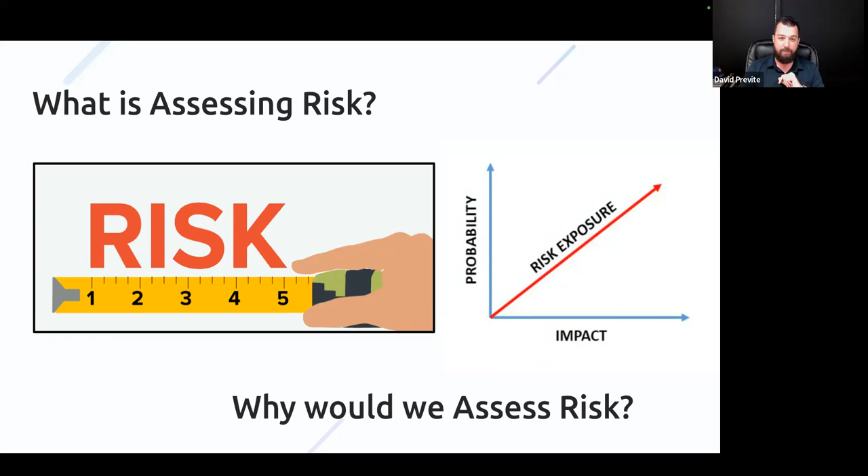I know we're starting at the basics here, but I think it's constructive to go back to basics and build the foundation sometimes. Next question is, why would we assess risk? Well, the answer is pretty simple, obviously, and it's dollars. If you understand your risk, then you can appropriately determine what is and isn't good value, because something that is very low cost but is also certain to fail is actually very poor value, because your money's being completely thrown away. At the same end, over-specifying something uses a lot of money, but may not be good value because it was actually a low-risk scenario.

So when's this important? Purchasing of any building element is an investment. So whether that's waterproofing or fireproofing or structural considerations, anything like that, you're paying money and you want to get something in return, right? Another couple of points here. Good value equals high waterproofing performance per dollar spent. Okay, so how do we do that?

Well, strangely enough, it's using a risk matrix, which you guys probably would have seen at some point in your career. These type of matrices are often used for safety, but it can be used in the exact same way for any quantification of risk. And like we touched on before, on our y-axis over here, we have a probability of it occurring. So what's the chance, from rare to almost certain?

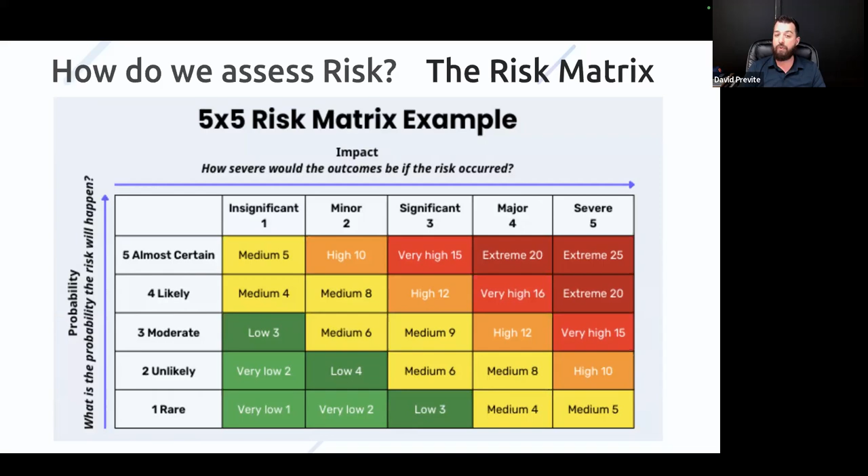And then on the other axis here, we have how severe would the outcome be? And then we've sort of got our heat mapping diagram there of, when you multiply those two together, what sort of rating you get for your risk. And just to show that off nicely here, we've got these cool little diagrams, which I thought was a nifty way to demonstrate this.

So start with the bottom left, low probability, low impact is jumping across this. There's a low chance that you're not going to make it, and if you didn't, it doesn't matter. Then we've got our opposite corners here, which is a low and a high combined together, so you can see what that means. And then, of course, the extreme on the other side is a high chance of you not making that jump, and then also a high consequence if you fail to make it. So again, probability times impact equals risk.

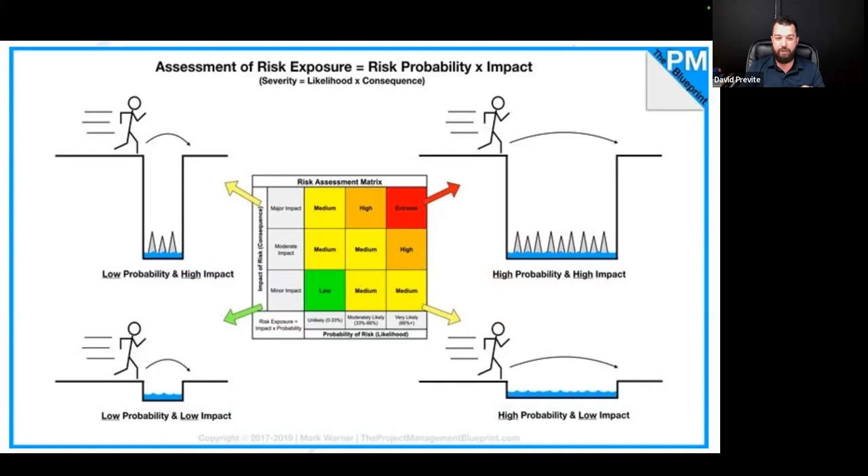So let's now take those basics and start applying them to waterproofing. So let's have a look first at our y-axis there, which is probability of water ingress occurring, and what are our considerations around probability. And the first one of those is the area open to the sky. If you're having an area which is open to the sky and gets rained on and gets very wet every time it rains, then you have a much higher chance of that location resulting in water ingress as compared to a covered area, such as balcony over balcony, just because the intensity of rain that would have to reach that balcony over balcony is a lot higher. So that's our first consideration.

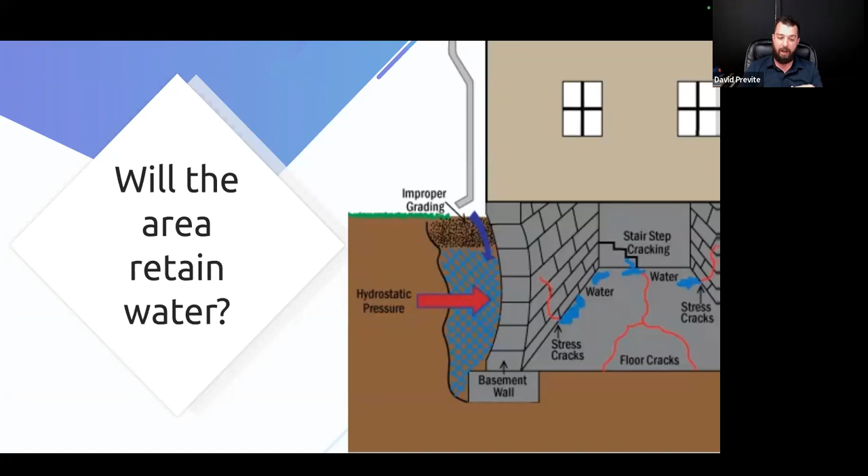Next one is, will the area retain water? So this is our below ground consideration here. Obviously, if we have a water table here, it's fighting against water constantly. So that's another high level exposure that we're having to fight against, that increases the probability.

And the next one is, is the area structurally stable? So this is particularly important to waterproofing, because if you don't have a stable substrate that the membrane's applied to, specifically around liquid membranes and whatnot, sheets are a little bit more fault tolerant. So is it structurally stable? If it's a lightweight frame or something of that effect, you're going to have a lot more movement, a lot more chance of a failure potentially occurring compared to a more stable substrate like reinforced concrete. So that's just 3 examples. There are a lot of other factors to consider that increase the probability of a failure occurring.

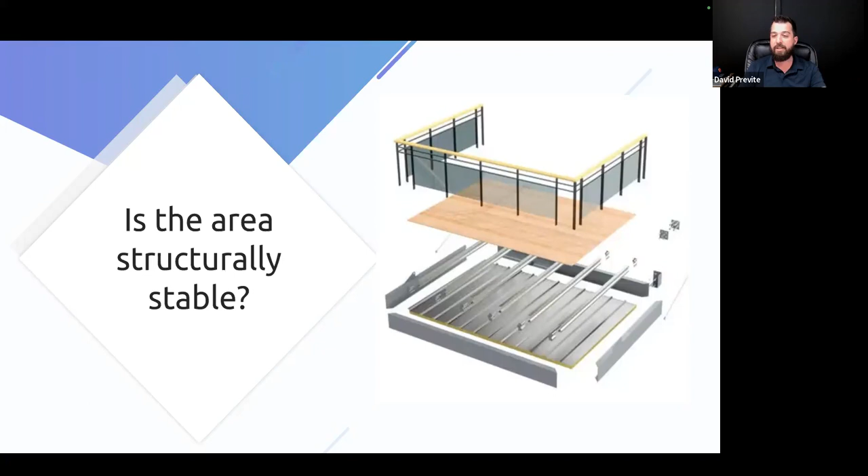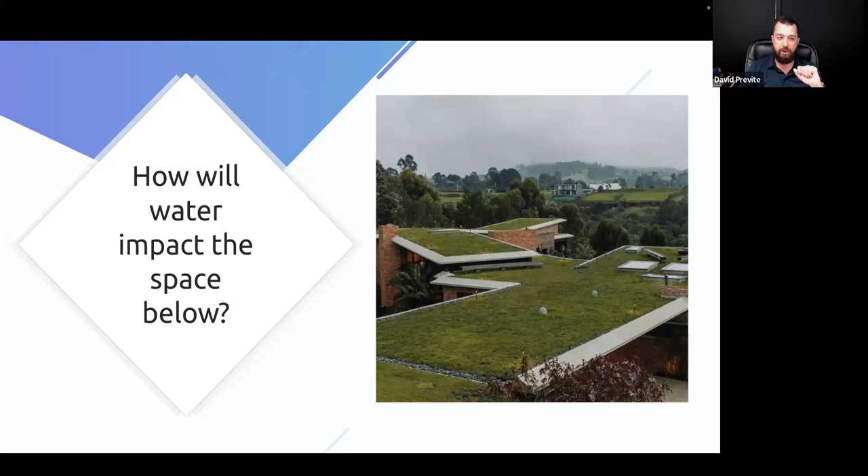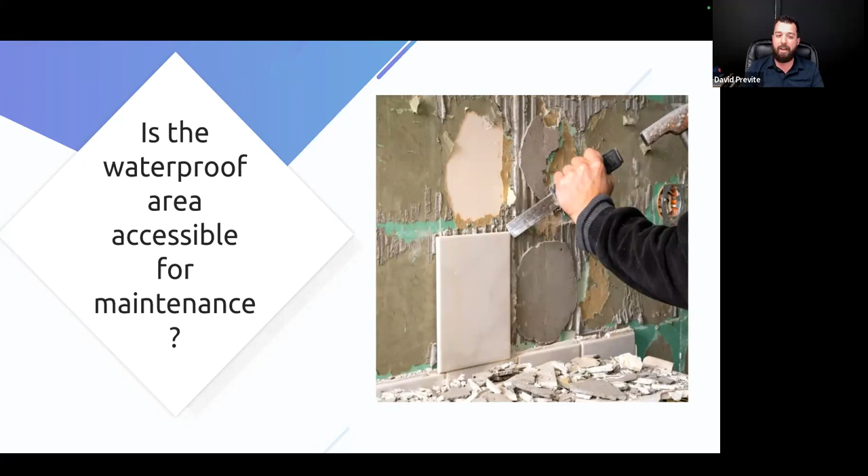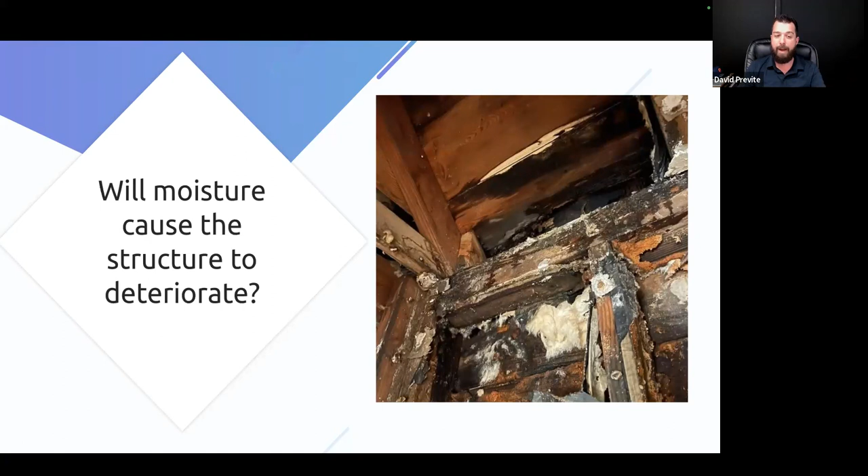And then finally, will moisture cause the structure to deteriorate? So we all know a lot of different types of structures. Some are going to be much more susceptible to water and moisture deterioration than others. So if water does bypass the membrane, how badly is it going to damage the structure? In this instance here, pretty badly. Also have another nice example here. While concrete is more water resistant, it definitely can fail through carbonation of the concrete, oxidization of the reo and whatnot. So just important to point that out while it is lower.

You can reduce the probability of a fault occurring by eliminating the water sources, and use waterproof systems specialized for the proposed area. So a custom solution rather than a generic solution. I can't tell you how many times we see a liquid membrane proposed for an area just out of habit, and no one actually thinks about what is the right thing for this specific scenario.

Next one is use premium quality waterproofing systems with an increased design life and warranty, just so there's increased confidence in the performance. Next one is use multiple lines of defense. So if your primary system does fail or you think there's a risk of it, have a backup layer.

Probably a simple example of this is if you were to do below ground waterproofing and you had habitable space inside, our advice would be to never rely on just one line of defense, especially when it's so hard to rectify and the consequence is so high. You want to apply an external waterproofing, and then you also want to have an internal liner applied to capture that water in the event there's a failure.

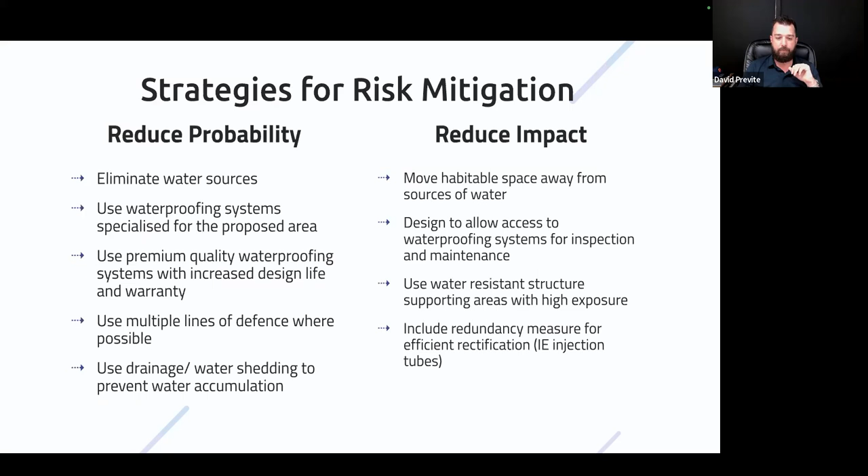Okay, so now that we've established all of that, let's look at a couple of examples and try and quantify the risk on those areas. So this one here, we've got a low chance and low impact outcome. This is a concrete balcony over balcony, and we've applied a low cost liquid membrane to a stable substrate, being reinforced concrete. It is also over an external area, so it's not over habitable space and not open to the sky. So you would say that while a liquid membrane is a cheaper version, it's appropriate and good value for this instance because it is a low probability and low impact solution.

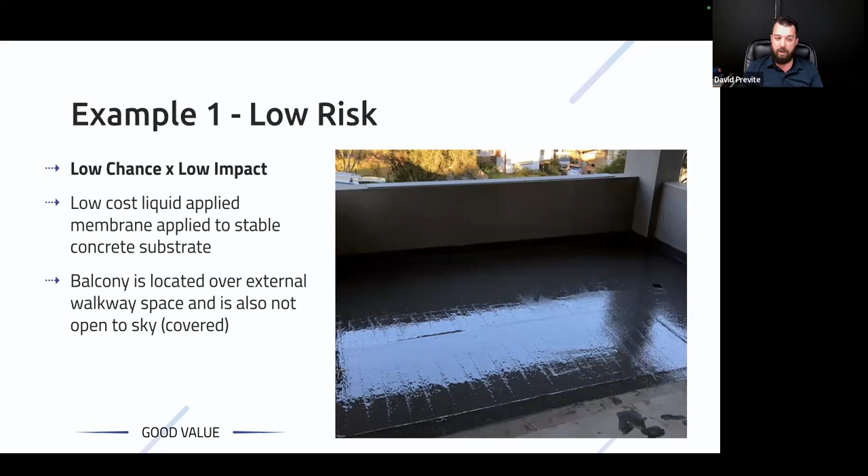Compare that to our next example. We've got, again, a similar liquid membrane system applied, but it is a full timber substrate here. So because of that, we've got a high chance. It is open to the sky, this area. It also does have habitable space below. So that's high chance being open to the sky and then high impact with habitable space below. We've got a cheap liquid membrane here.

Your structure can deteriorate, your internal finishes are going to be damaged, and depending what floor finish is applied here, it can be difficult to actually get to the problem and fix it again. So we'd consider this a poor value solution. It might be cheap, but it is highly prone to failure with a high consequence. And that's why we wouldn't recommend this to any of our clients, because it's poor value.

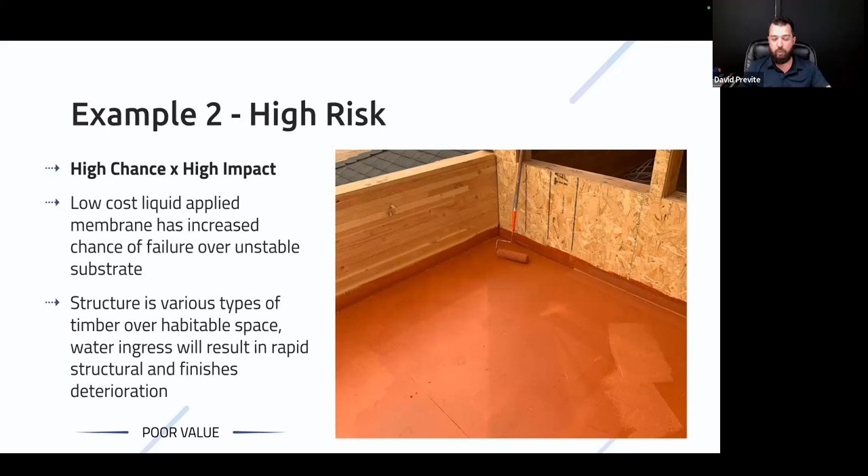Then finally, we've got a bit of both here, where we've got a medium chance of failure just due to the exposure. We've got an open to the sky area and planter boxes. We also have high impact below, so habitable space below, probably with some expensive finishes in there and that sort of thing. And what they've proposed, being a bit more high end, is to use a high cost PVC sheet membrane in this instance.

We would say the risk is moderate, and it is moderate risk partly because of the premium system being applied. PVC membranes are often considered to be a premium quality system compared to a liquid membrane. So because of that, we've put good value against this. Yes, you're paying money, but you're also getting a good amount of mitigation in a high exposure, high consequence scenario.

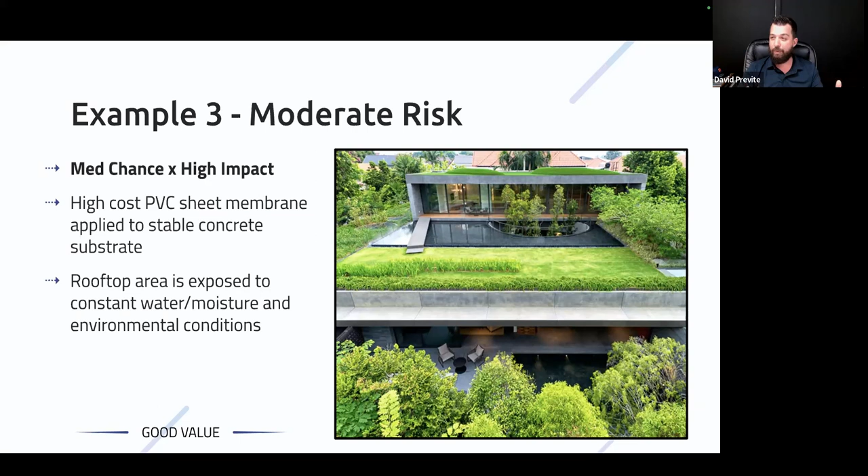So that's effectively the three examples. And it looks like I've rushed through this relatively quickly. So I have prepared a bit of additional content if you guys are happy to have a look through those. These are just interesting things I've come across on site previously. Do you want me to run through those quickly, or do you want to have a talk about anything we've covered?

Yep. Yes. That's a yes to the extra content? Yes. Okay, cool. So these are really just some photos of some case studies, we'll say, that I've come across previously. Recently actually.

However, where they fell over, and to me this indicated a relatively inexperienced installer of this particular system, because they were able to do the easy stuff. But when it came to the difficult stuff, the detailing around penetrations, whether it's a drain point or an anchor point, any of the pressure seal terminations or any of the abstract shapes, their quality of welding and consistency was very off. We've seen a lot of areas where they just hadn't sealed it properly, or where they had actually overheated it and burnt it.

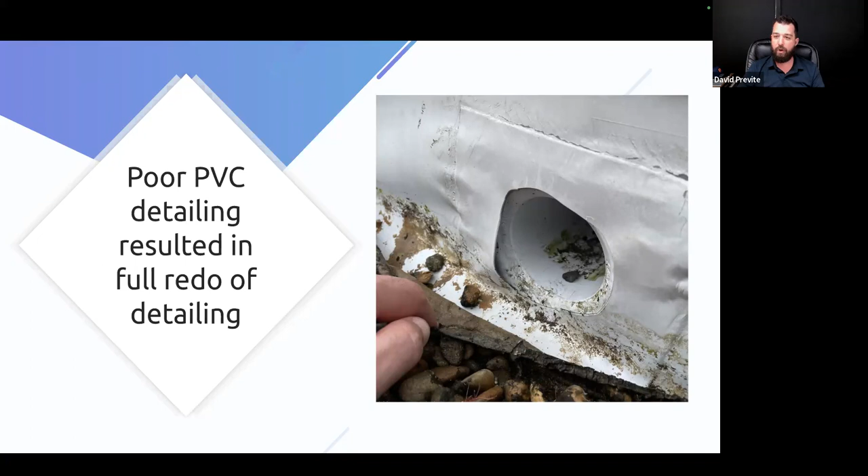So this is just one instance there. You can obviously see they've got multiple layers around this drain point, and there's just gaps in the consistency there. So this roof was actually leaking quite badly after they'd just paid for it to be redone. And what it resulted in was a full redo of the detailing. They didn't pull up all of the membrane, but all of the perimeters and all of the details needed to effectively be cut out and redone because of the quality of workmanship there. So yeah, that was an interesting one.

And then this is actually quite an important one, because we see this overlooked all the time on construction sites. So this is a planter box wall. As you probably know, you want to have isolation joints in your block work, because if you have too long of a run, it's going to crack at some point. So these isolation joints were installed, and most waterproofers will prefer to use a sealant or a caulking just because it's easy to do as opposed to bandages.

Now, this one in particular, I'll skip to the next one, and you can see the zoom in there, the sealant they'd applied, that joint was about 10 mil wide. This membrane was left exposed, so they had a couple of hot days, cool nights sort of thing, and the sealant actually failed there. So we're lucky that we picked this up. This was the waterproofing before they came and rendered and painted over it. We picked it up, we marked it as a defect to be rectified. We told them, replace it with a bandage. You're not going to get this sort of failure to accommodate movement.

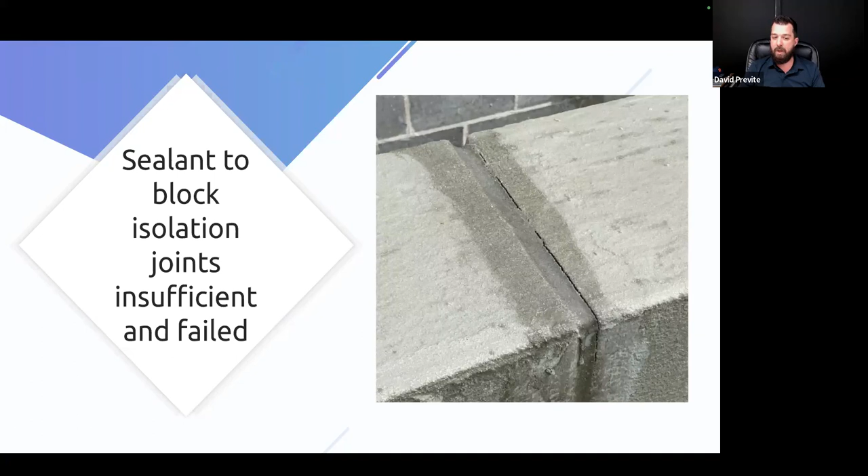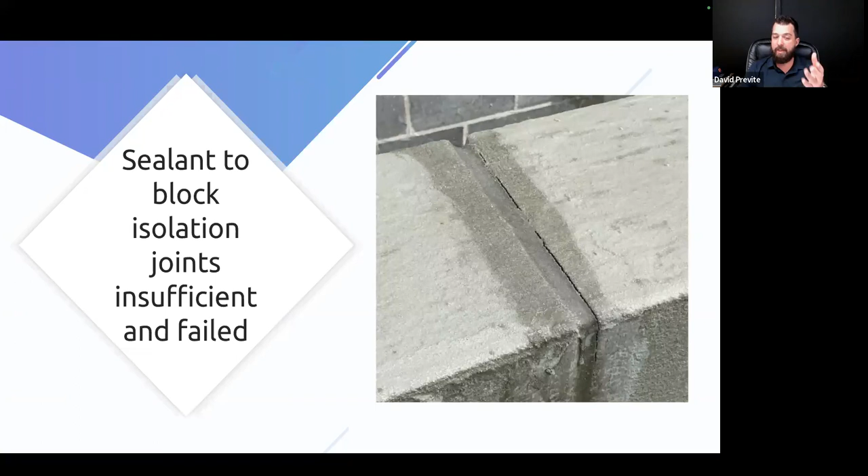The sealant just hadn't stuck to the sides of the block well enough. And while the sealant does have good elongation properties, that doesn't matter if, as soon as it's put under tensile strength, it just falls off. There was actually no tensile force applied to the sealant because it immediately debonded from the block beside it. And then the membrane, being cementitious with not a whole lot of flexibility, just immediately failed.

So fast forward to what this would have looked like if we hadn't picked it up. That joint would continue to move. In this instance, they just rendered straight over the top of it, and you can see the crack showing through the render, and water would just go straight down inside that block wall.

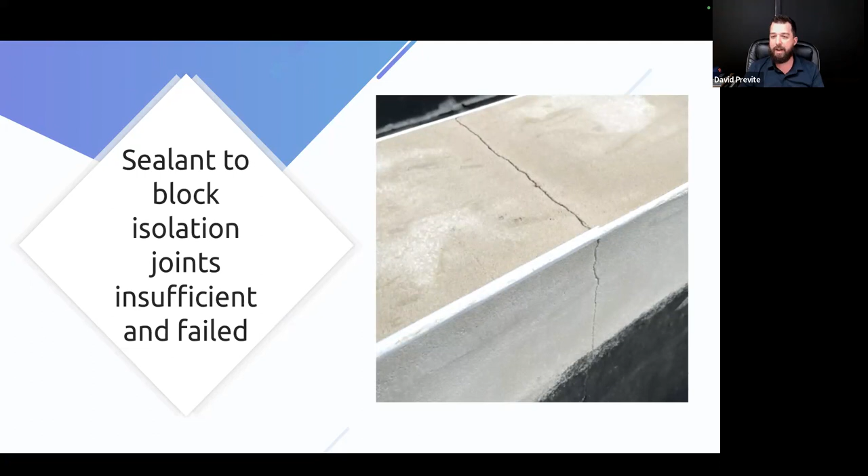Yeah, so that's one there. Slightly different change of pace. This was just something I saw in my local shopping center. Example of a bad tile joint. This doesn't really have anything to do with waterproofing, but tiling is somewhat related.

So we've got a nice neoprene strip here that's accommodating movement. There was an area where it looks like they forgot to install this, and it just cracked. So what they did was route out the cracks somewhat roughly and put a bit of colored sealant to try and camouflage it in. Lucky this is actually internal space, but I just happened to grab some photos out of interest. So not the best way to be sealing your tile joints.

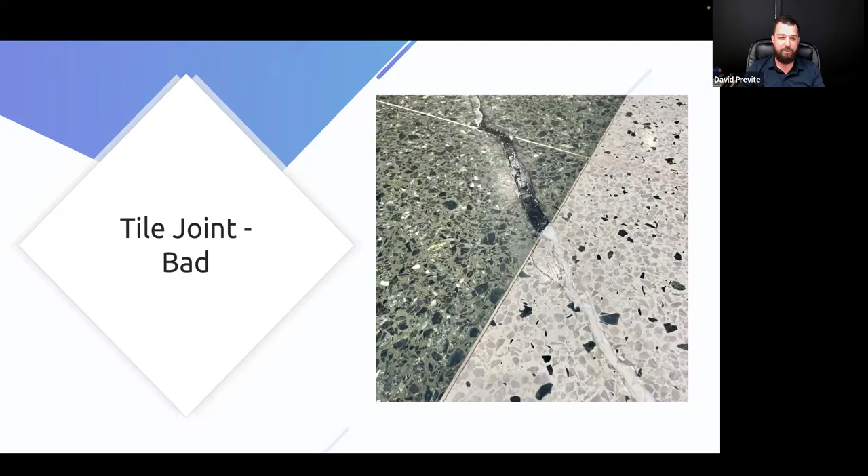This here was a rooftop membrane. We hear a lot, isn't your liquid membrane supposed to work in water tanks, and what's the problem if there's a bit of ponding, that sort of thing. Every so often we get a nice case study of where they've had ponding on the roof. And in this instance, you can see where it's really not withstood that water over a long period of time.

So might be a little bit hard to see there, but it's actually become very wrinkly. As it's absorbed moisture and allowed it to transfer through into the substrate, it's just deteriorated. So that's very weak. There are areas where that's been walked on and it's been easily damaged after probably about 5 years. So this probably held up a bit longer than it might in some instances, but it definitely does deteriorate under ponding. So a little bit of evidence there.

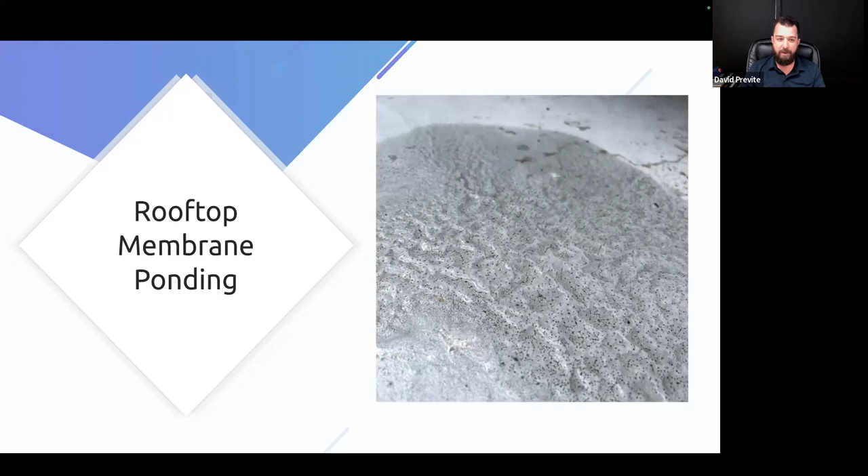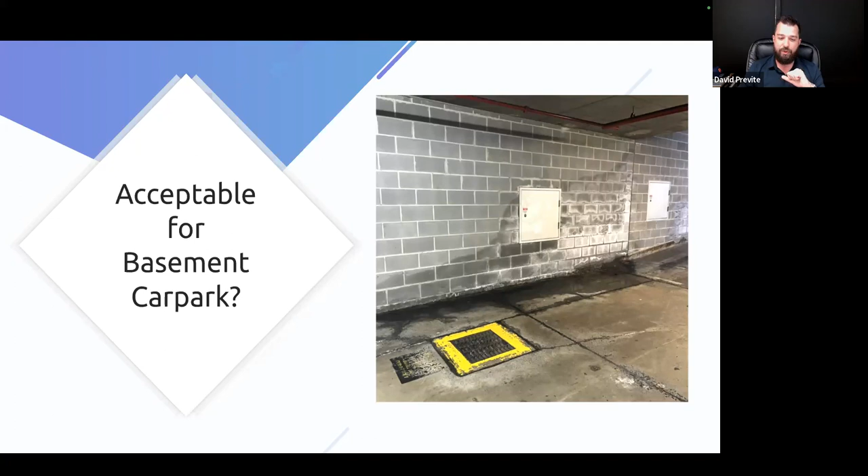For all the PCAs and BCA consultants in the room, this is maybe just a bit of food for thought. Is this actually acceptable? We get a lot of comments about Class 7A as per the NCC being excluded from any requirements for waterproofing or whatnot, as stated in Volume 1 there. But is it actually acceptable to have this sort of thing going on in your basement? So this, from my understanding, was caused by 2 things.

They actually do have water behind this block seeping through here. And then, of course, that moisture is just soaking up into the block wall like a massive sponge. All of the discoloration you can see here is efflorescence and salts leaching out of that block based on the moisture. And it's very interesting. I went over to that wall and there was a fur coating on that wall of about 15 millimeters that was just the salts accumulating as that cycle of moisture came out of the wall.

Not only that, this crack in the slab here and water coming through the slab was located immediately above that. So it was dripping down into these areas and causing this pond here as well. So not really any definitive point to that one, just as a point of discussion for you guys about whether that's acceptable under the current NCC and whether it should be.

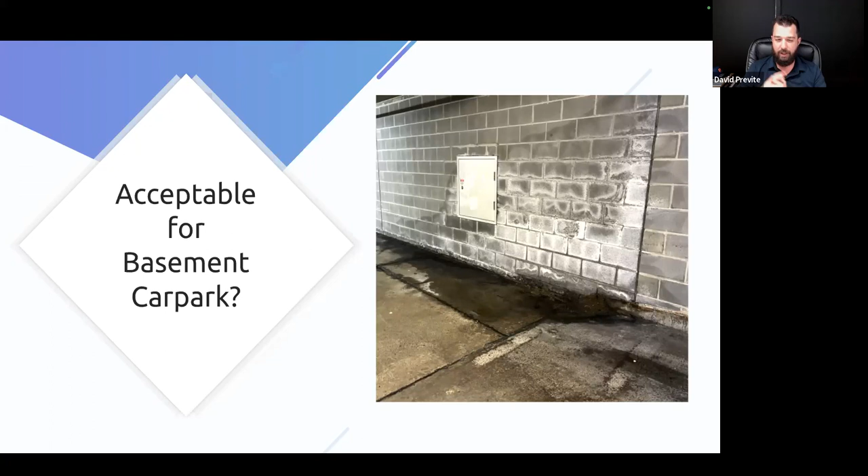Oh, and by the way, when I do get a chance to come up there and see you guys in January, happy to talk about a not-for-public-consumption-yet draft that's coming out of the 2025 version of the NCC via the AIW, where we're currently consulting on that, and there's a lot of changes being made around that space. So yeah, we can talk about that more at that point.

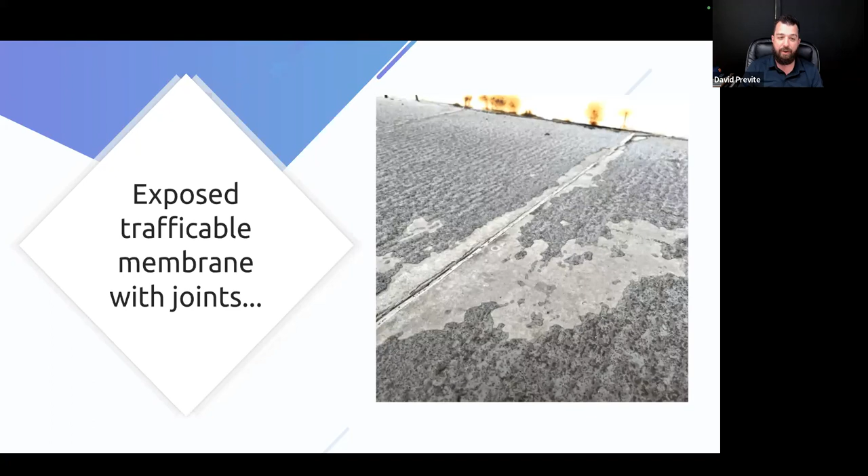Between the rigid top coat and the traffic this walkway received, it really only lasted a year or so before the sealant started failing. The waterproofing membrane over the top cracked and failed, and the whole thing really just peeled back away. You can see fixings there, and this is just exposed FC structure. So just a bit of a cautionary tale there, especially in trafficable situations, but also in non-trafficable.

I just really don't think that liquid membranes, unless you're doing very well detailed bandages over these joints, perform well; they struggle, and I've seen a lot of failures around these lightweight frame structures like this. So yeah, effectively, that's it.